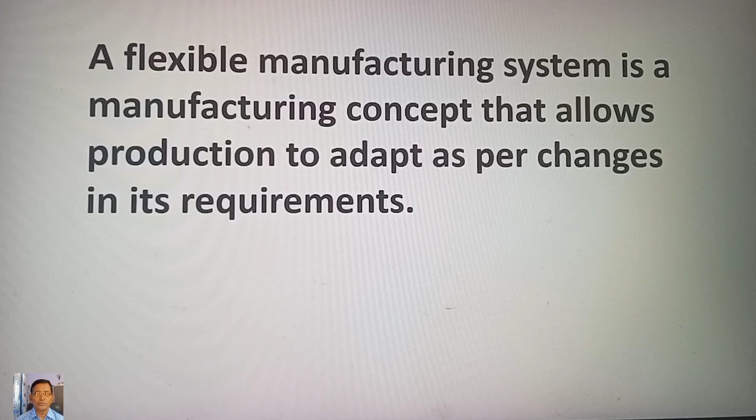An FMS enhances efficiency and reduces production costs, and its automated nature reduces labor costs. The changes may be either predictable or unpredictable. However, it requires a significant initial investment as well as skilled technicians.

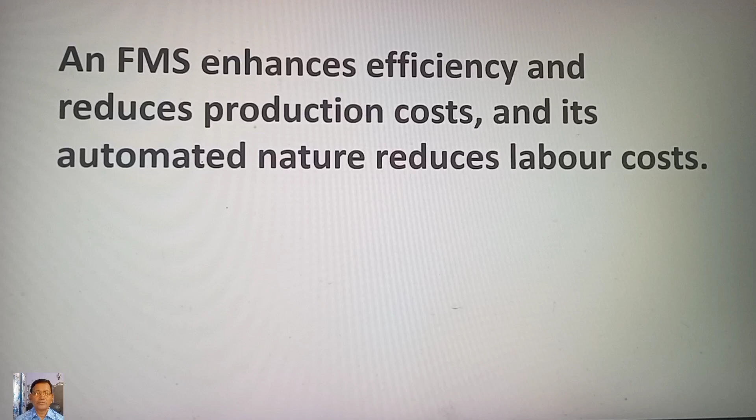Then, let us see how flexible manufacturing system works. A flexible manufacturing system could be machine flexible, material handling flexible, or operationally flexible. Flexible manufacturing systems typically consist of three main functions that allow the system to remain operational.

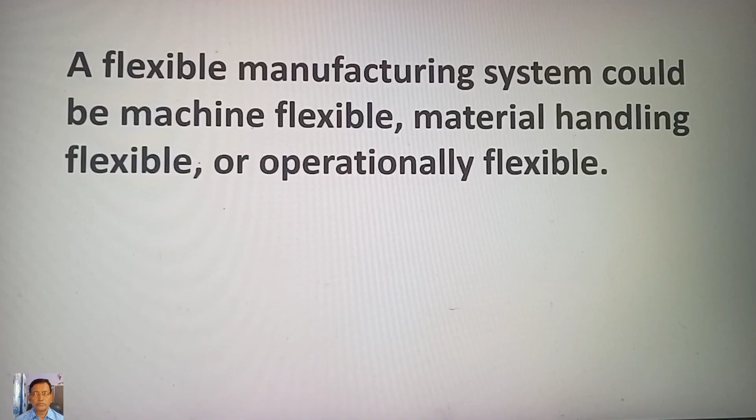Main functions of FMS. First, central control computer. Second, production machines. Third, material handling systems. These three functions work together to allow a smooth transition of information and functionality from one component to another. Working of flexible manufacturing system can be compared by the different functions of human body parts: the brain, muscles, and blood.

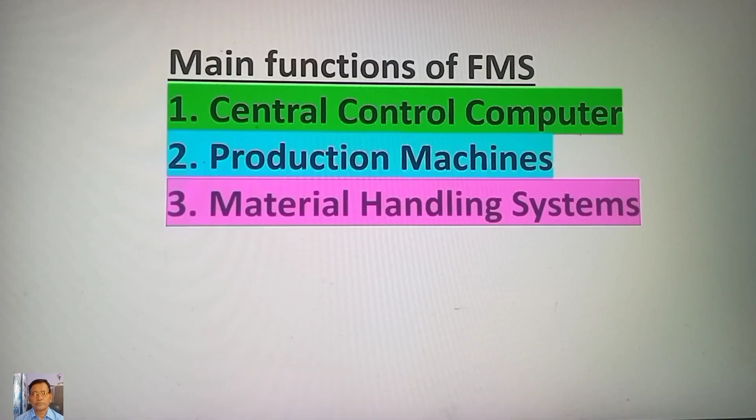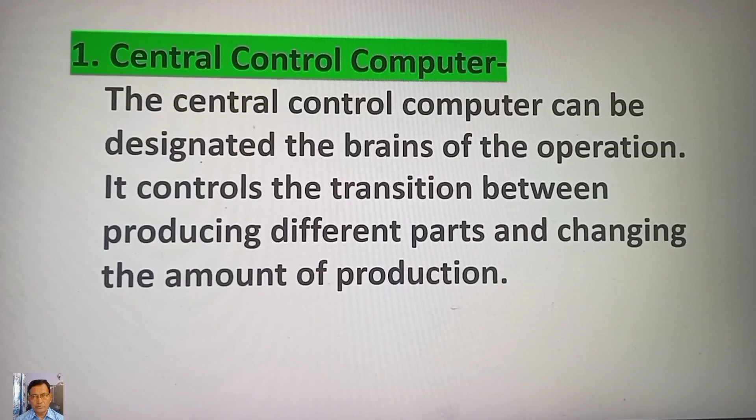First, central control computer. The central control computer can be designated the brains of the operation. It controls the transition between producing different parts and changing the amount of production. Second, production machine. The production machines are the muscles of the operation. These highly automated machines can change tasks rapidly when needed. Again, the production machines connect to the material handling system to receive the required materials to produce a specific part.

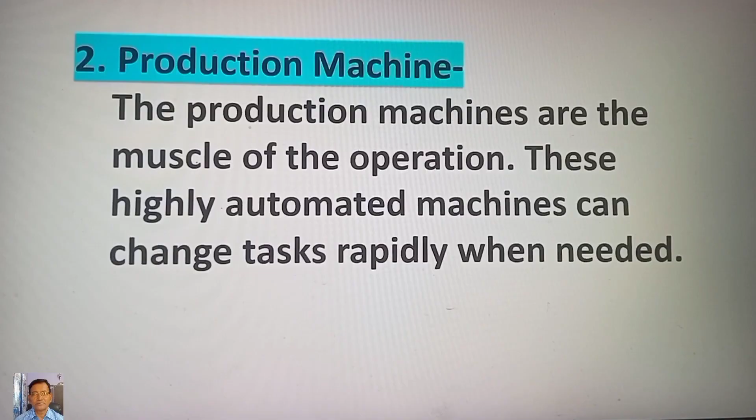Third, material handling systems. The material handling systems are similar to the nutrients in the blood sent to the muscles to keep them moving and functioning properly. The part of the system is critical in getting the right materials to the right places.

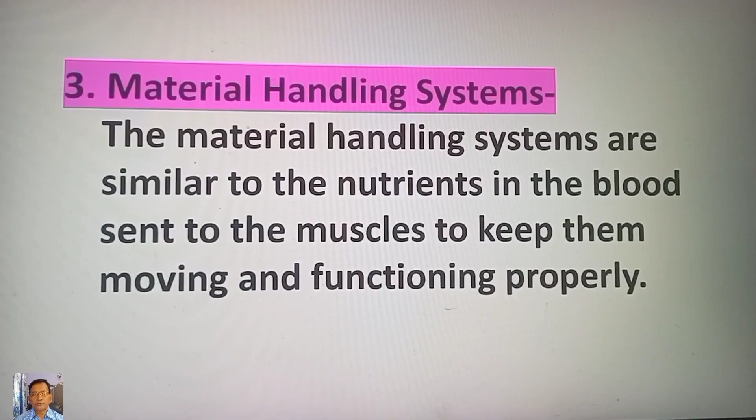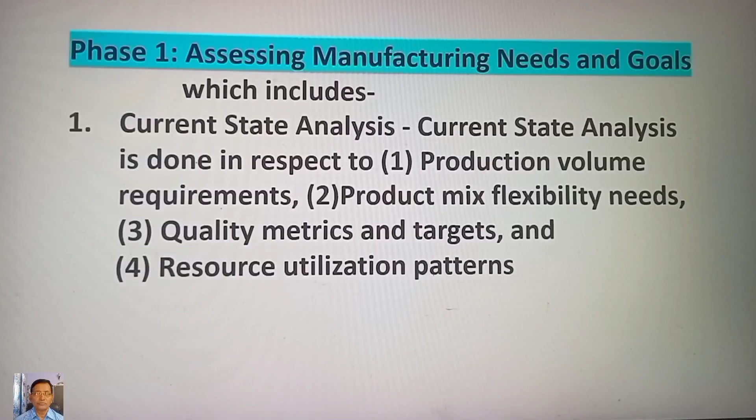Let us discuss a systematic guide how to implement a flexible manufacturing system. Implementing a flexible manufacturing system occurs in three phases. Phase 1, assessing manufacturing needs and goals, which includes first, current state analysis. Current state analysis is done in respect to production volume requirements, product mix flexibility needs, quality metrics and targets, and resource utilization patterns. Second, future state definition. It means what we expect in future for growth projections, market demand forecasts, technology roadmap alignment, and capacity requirements.

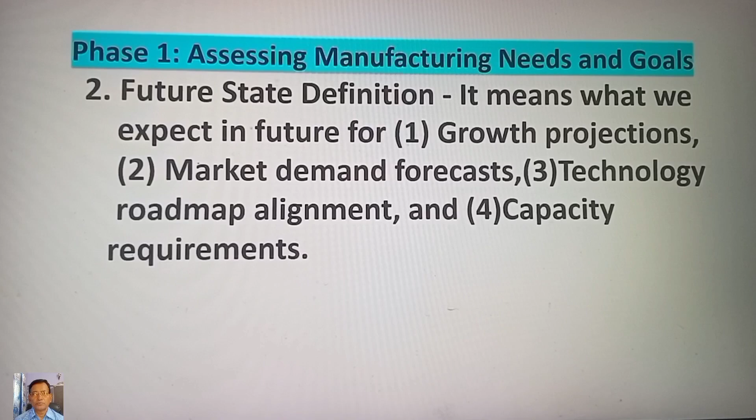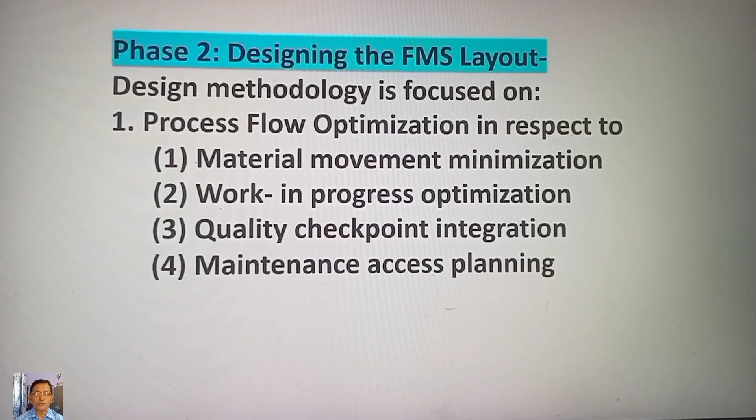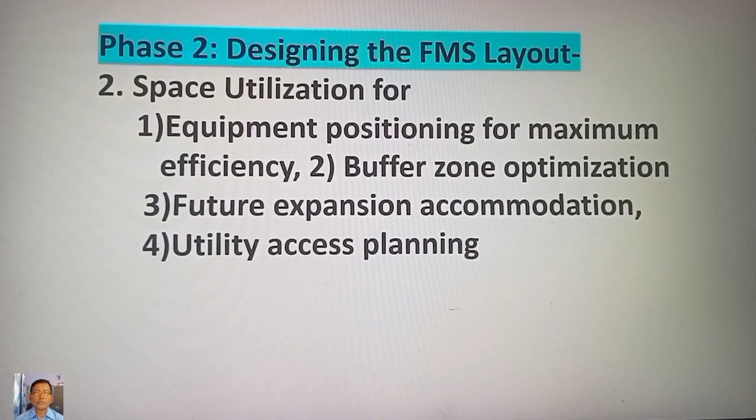Phase 2, designing the FMS layout. Design methodology is focused on first, process flow optimization in respect to material movement minimization, work in progress optimization, quality checkpoint integration, and maintenance access planning. Second, space utilization for equipment positioning for maximum efficiency, buffer zone optimization, future expansion accommodation, utility access planning.

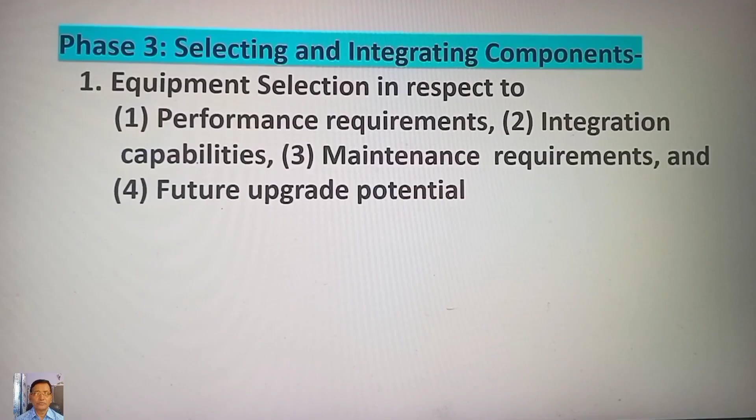Phase 3, selecting and integrating components. First, equipment selection in respect to performance requirements, integration capabilities, maintenance requirements, and future upgrade potential. Second, system integration for communication protocols, control system architecture, data collection capabilities, and quality monitoring systems.

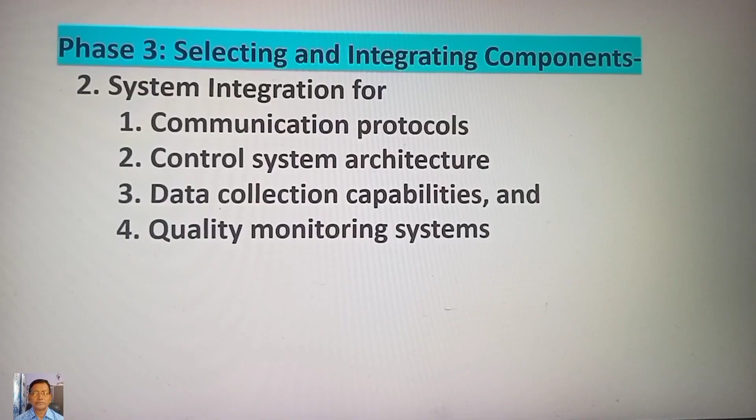Let us discuss the key advantages that FMS delivers. Advantages of FMS. First, increased productivity and efficiency. Second, reduced setup times and changeover costs. Third, improved quality control. Fourth, enhanced production flexibility. Fifth, reduced labor costs. Sixth, optimized inventory management. And seventh, improvement in inventory turnover.

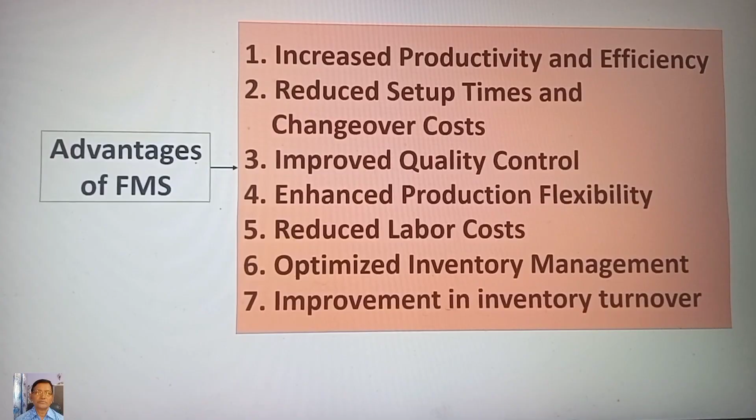However, there are many challenges and disadvantages of a flexible manufacturing system. So, we have to understand and prepare for potential obstacles. Disadvantages of FMS. First, high initial investment costs. Second, implementation complexity. Third, system downtime. Fourth, skilled workforce requirement. Let us see where flexible manufacturing systems have been used successfully.

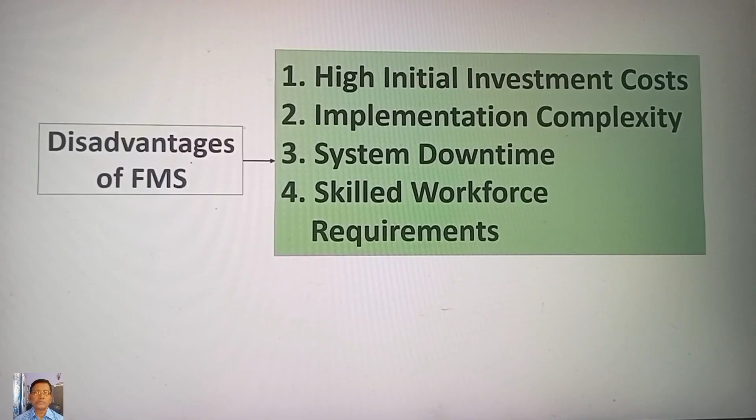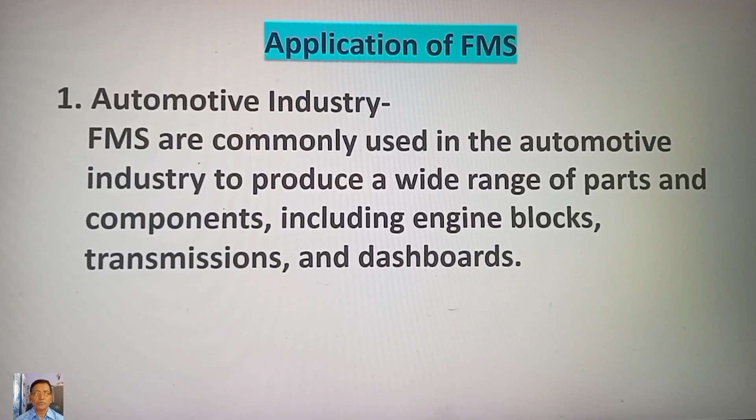Flexible manufacturing systems, FMS, are used in a wide range of industries which include: first, automotive industry. FMS are commonly used in automotive industry to produce a wide range of parts and components, including engine blocks, transmissions, and dashboards. Automotive FMSs are designed to be highly flexible, allowing manufacturers to quickly reprogram the machines to produce different parts as needed.

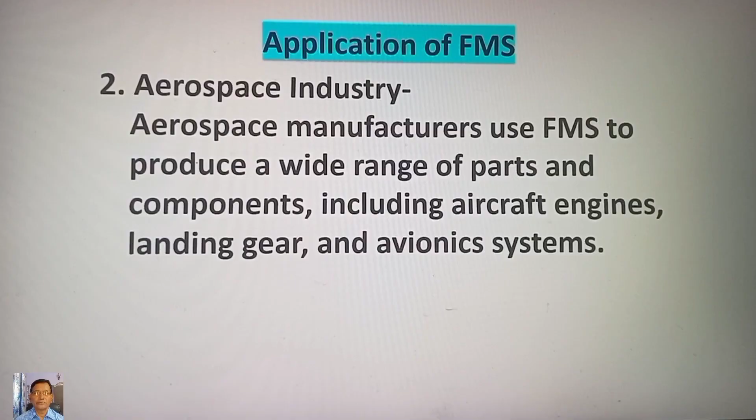Second, aerospace industry. Aerospace manufacturers use FMS to produce a wide range of parts and components, including aircraft engines, landing gear, and avionics systems. Aerospace FMSs are typically highly automated, with computer-controlled machines that are capable of producing complex parts and components with a high degree of precision.

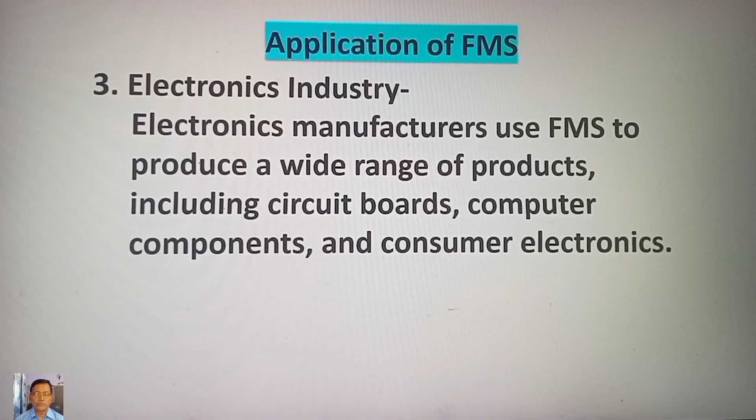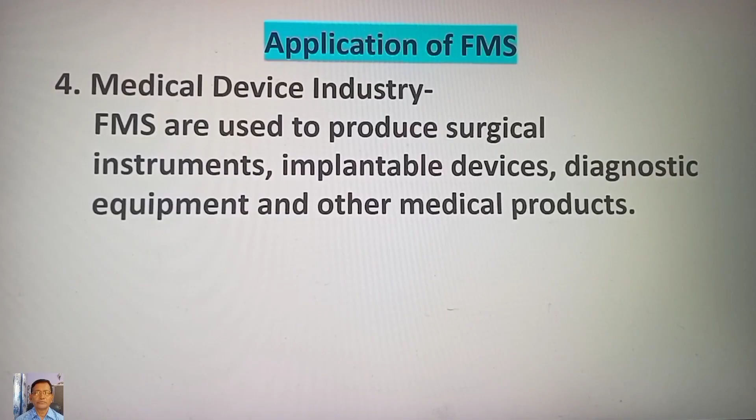Third, electronics industry. Electronics manufacturers use FMS to produce a wide range of products, including circuit boards, computer components, and consumer electronics. Electronics FMS typically consist of a series of computer-controlled machines that are linked together by a central control system. Fourth, medical device industry. FMS are used to produce surgical instruments, implantable devices, diagnostic equipment, and other medical products.

Fifth, food and beverage industry. A wide range of products, including packaged food and beverages, are produced with FMS. In general, FMS are used in industries where there is a need for a high level of flexibility, efficiency, and adaptability in manufacturing processes. Let us conclude.

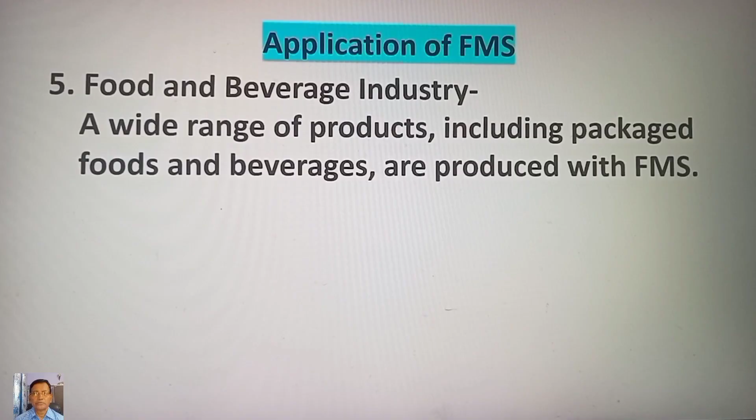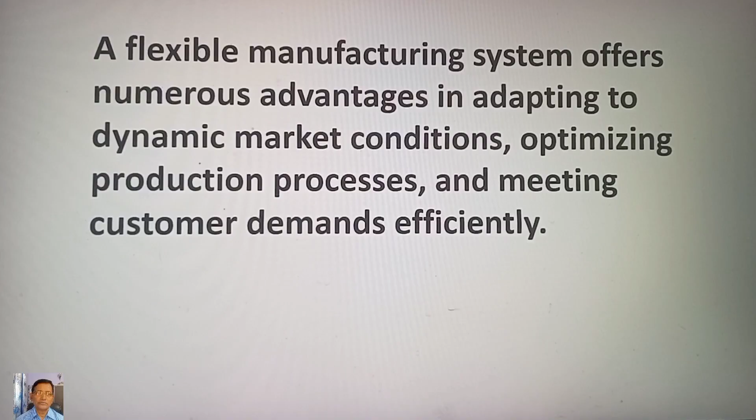A flexible manufacturing system offers numerous advantages in adapting to dynamic market conditions, optimizing production processes, and meeting customer demands efficiently. With its focus on flexibility and integration with advanced technologies, FMS enables manufacturers to stay competitive and achieve operational excellence in today's ever-evolving industrial landscape. The ability to quickly reprogram machines and adapt to changing production needs is a key advantage of flexible manufacturing systems, making them ideal for industries where demand for products can be highly variable. That's all. Thank you so much for watching the video.